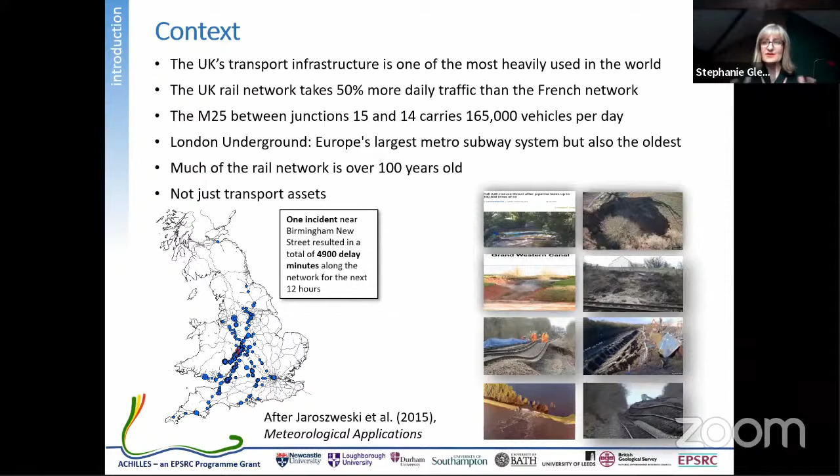So the illustration there is a failure near Birmingham that has cascaded to Scotland, across to London and down to the tip of Cornwall and into Wales. So failure is a big deal. In terms of its relationship to weather, we've all probably experienced almost anecdotal information that when it's wet, we get failures, particularly on the railway.

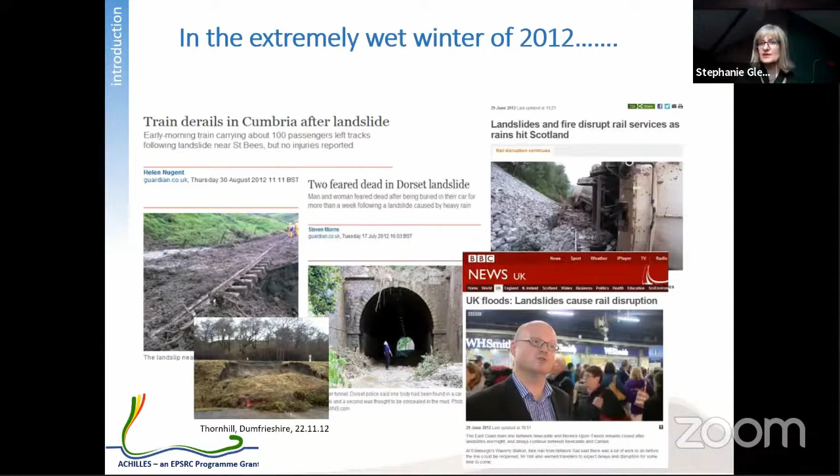So this was 2012. It was characterised by a wet summer, which is actually important, because part of what we found holds up our clay, particularly our embankments, but also to an extent cuttings, are the suctions that build up in those materials. They build up in the summer, usually because of dry weather. And when it's wet in the summer, those suctions don't last as long, and sometimes that loss of suction causes the triggering of failure. And this is showing the summer of 2012, but last summer in a wet period we also had the unfortunately fatal crash at Carmont in Scotland.

And looking at some data related to the effect of rainfall on failures across the network. This is a plot of soil moisture deficit, which is basically the amount of extra capacity that you've got in the soil to take on more water. So when the soil moisture deficit is 0, there's more or less no capacity to take on more water. And this is a plot with time across the x-axis.

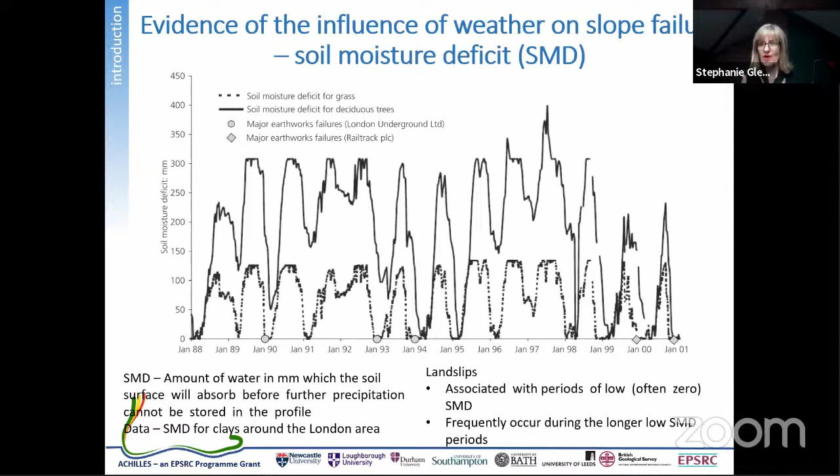You've got greater deficit or greater suction that's brought about with large trees, which is the hard line, and the dotted line, which is grass. And then the failures that occur around the network on the earthworks in London Underground and what was then Railtrack are when the soil moisture deficit is 0. So that's when it's wet. So we've got evidence to say that wet weather causes or is a trigger to failure.

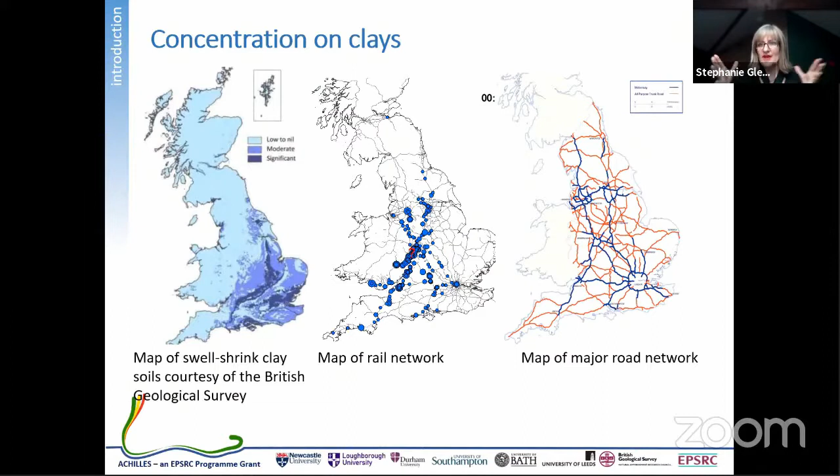The work that I'm going to describe, we have concentrated on clay materials. They aren't the only materials, they're not the whole picture, but it's just where we've started. And just to illustrate, it's a minority amount of material, but it's still significant because it occurs over quite a wide part of the network, and the parts of the network that are most densely used. So that's the scope of what we've done.

And what happens to those materials then, it's not just about wet, but it's also about the cycles of wetting and drying from summer to winter. One of the effects of those cycles is to cause shrinking and swelling of those clay materials. This is an embankment, and that then causes the differential movement of the track, which causes serviceability state failure. You can see that illustrated very well in that photograph. You can also see the out of true signals.

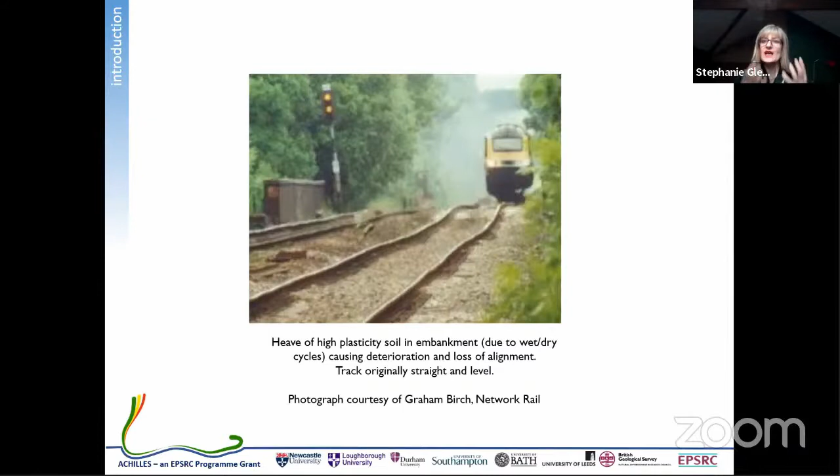And we also believe that this shrinking and swelling action, and I'll come to talk about this in a bit, has the potential to go on to lead to ultimate limit state failure. And this is an example, obviously it's a cutting, but this material here has deteriorated and then caused a failure, which is obviously causing great disruption. This is the London to Bristol line, which I'll use as a case study a bit later in the talk.

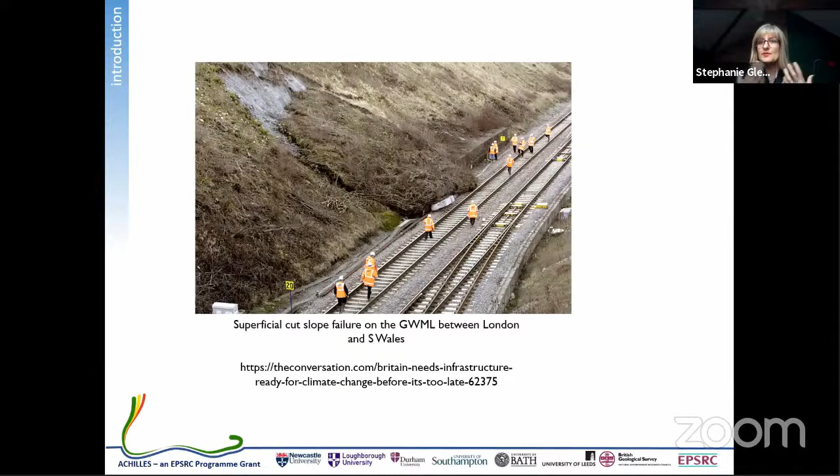So weather has the effect of wetting and drying that causes potential long-term deterioration. It also has the effect of potentially triggering failure. And what we wanted to do was understand these processes and these triggering events so that we could be more informed about how to manage this across the network.

So the ACHILLES programme, as I said, is concentrated on clay materials, but our aim is to add to the knowledge base that can deliver more consistent, affordable and safe services, and to add to the data about intelligent design, management and maintenance. Today I'm going to concentrate on railways, because railways are older. There are quite a lot of failures on the rail network, and the failures are far more costly and disruptive than predictive maintenance, and we could save a lot if we could more intelligently go in and put preventative measures in.

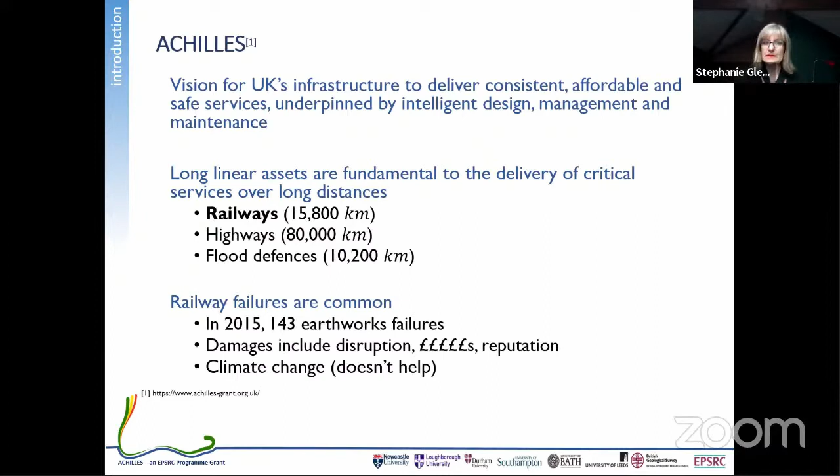So the work, again, is not starting afresh. We've got a long history of working, and this is a collaboration across a number of different universities. We're working with Loughborough, Durham, Southampton, Bath, Leeds and the British Geological Survey. And we're working together with our industry partners: Network Rail, Highways England, London Underground, and a range of their consultants. And also the Environment Agency on flood embankments, but that's another story.

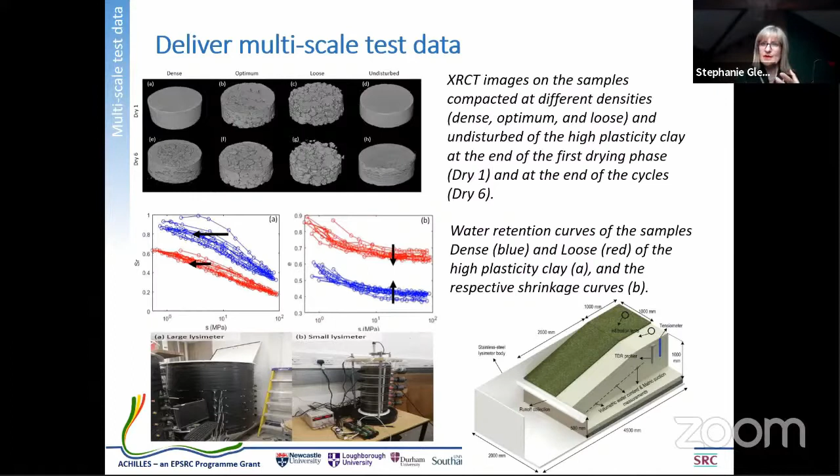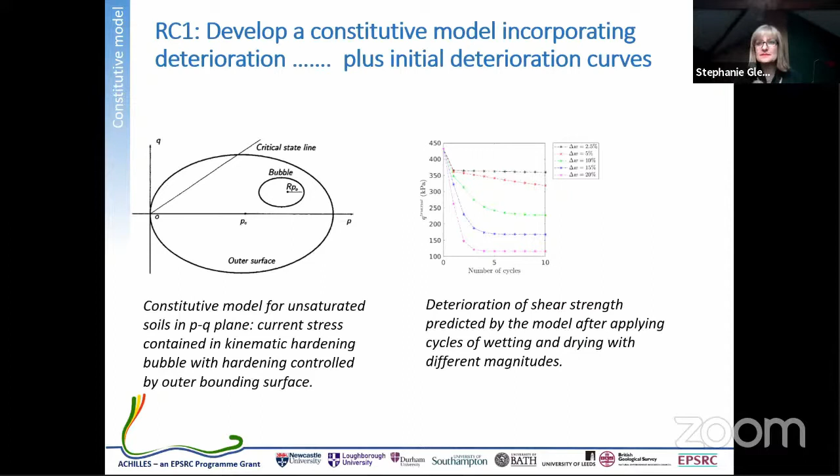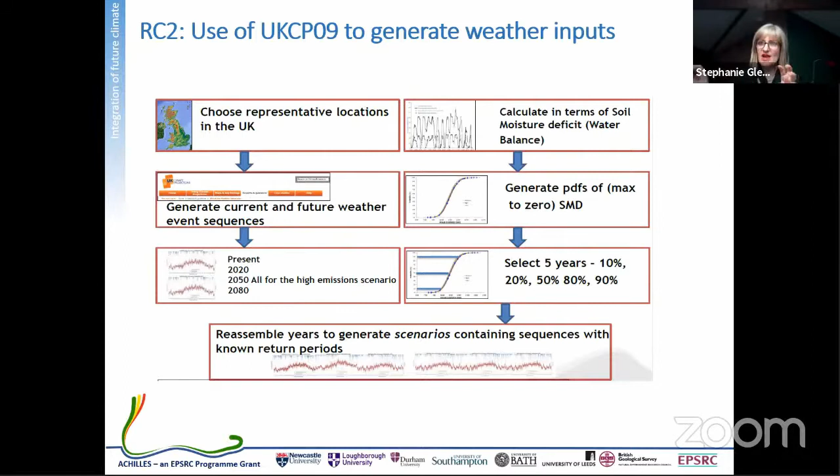We've not been able to use them directly because they give you lots of random weathers, which have extreme events at random points, which causes our models to then fail at random times. So we couldn't do designed numerical experiments. And basically what this slide is saying is that we had to construct our own weather event series in order to drive deterioration rather than to trigger failure.

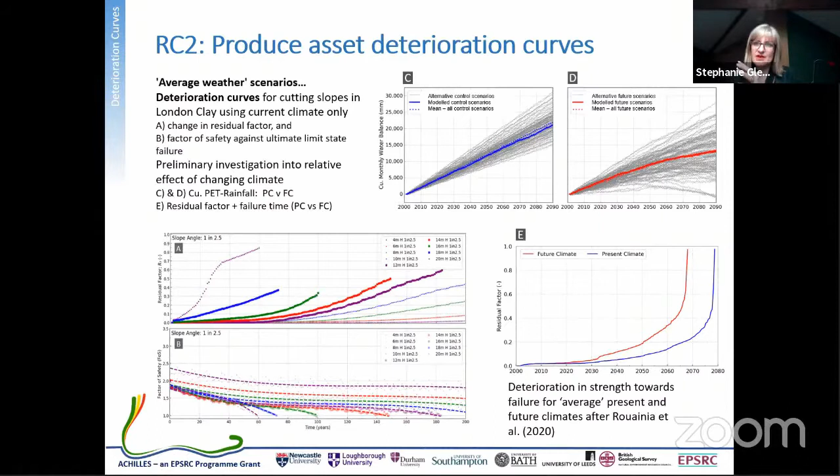And this slide then is to start to look at the implication using our numerical model with our designed future weathers. We've started to produce these deterioration curves. These are factor of safety, but the critical one on this slide is bottom right, that's saying that you can see with the future climate, which is the red line, that actually we've driven the material closer to residual strength quicker with a future climate than we have with the current climate. So this is starting to give us insight into the fact that climate change could accelerate deterioration in our clay slopes.

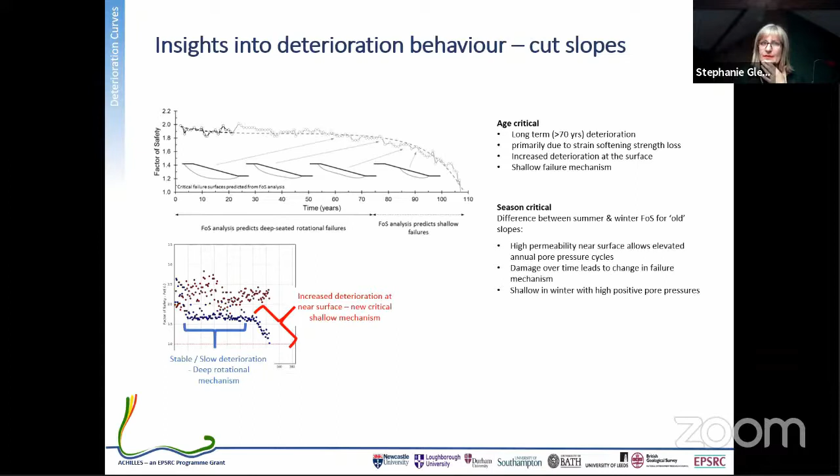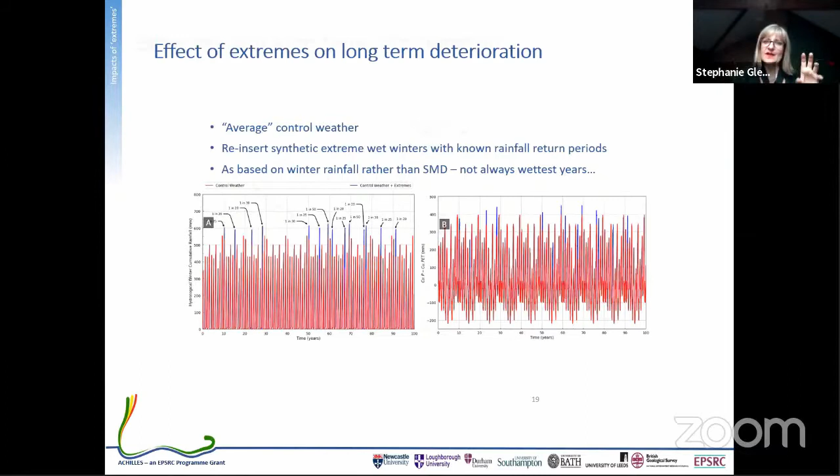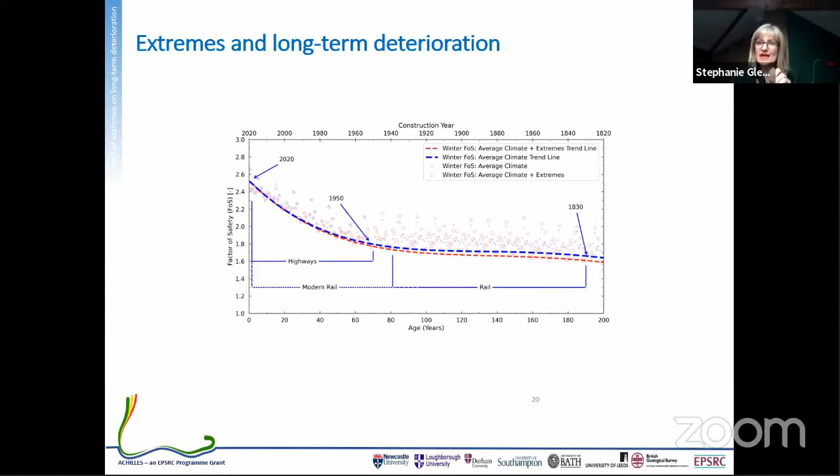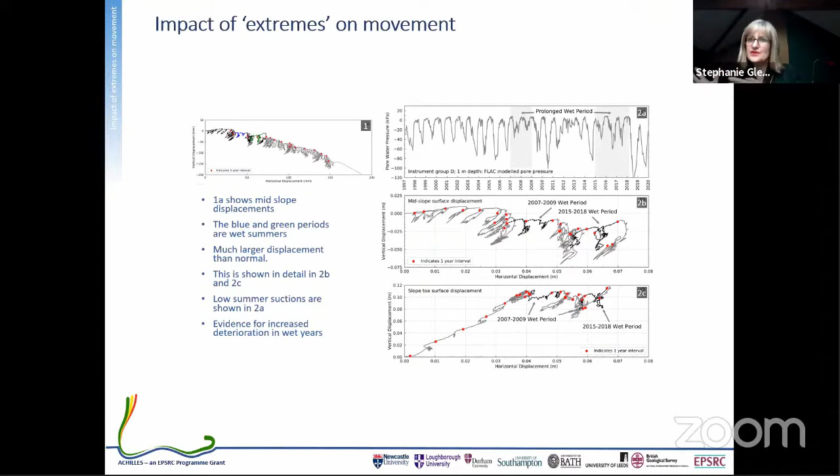We have also put designed triggering events back in. So we've looked at long-term deterioration, but we've overlain that with some designed extreme events. And again, the effect of that is to both accelerate deterioration, but also then potentially to trigger failure because your factor of safety is lower. And to observe how it does that is in this slide, where the wet period there is causing an increased movement downslope. And it's that acceleration of the ratcheting by the wet event that is accelerating that movement and that reduced factor of safety.

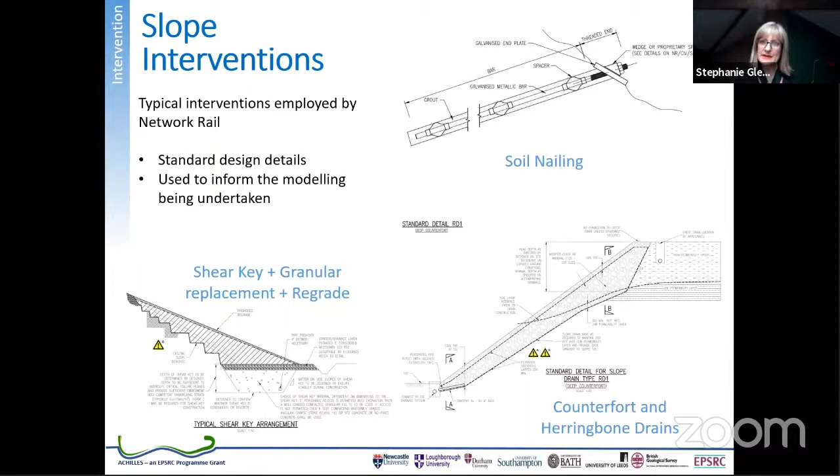Whereas actually, if we wait until it's seriously deteriorated or failed, you get much less of an increase in serviceable life. So it's starting to give us that kind of pointing towards the financial benefit, if you like, from doing preemptive interventions or maintenance rather than leaving the slope to fail, because actually you get better extension to life from doing that.

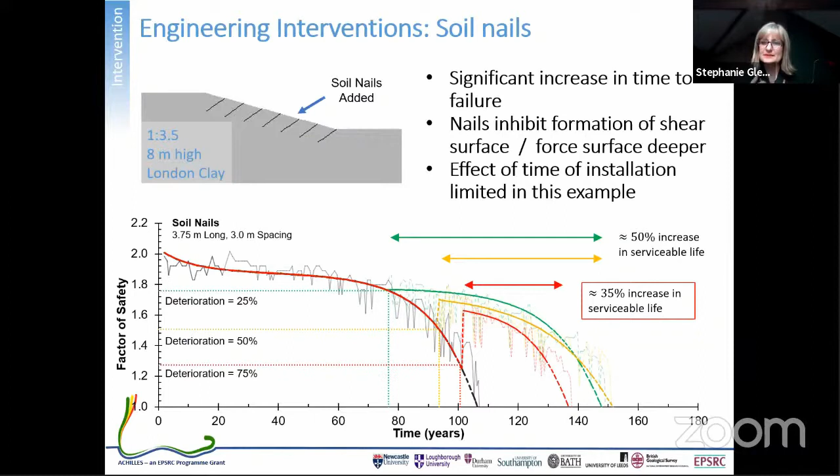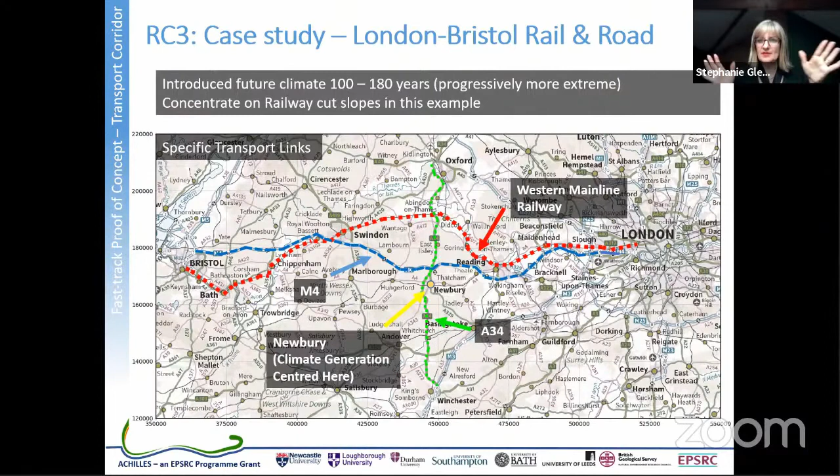The other thing we've done with the models is started to scale up. So instead of just looking at single slopes, we've started to look at the effect over a whole line. And this is where that London to Bristol line has come in. We've used this as a case study. We've also looked at the road at the M4, and we've taken some of our information from one of our field sites that's on the A34, but that's a by the way for the purposes of this presentation. Really, we've looked at that red line, the main line between London and Bristol.

And what we've done to narrow down the number of numerical models we've needed to run, because they're quite expensive in terms of time and effort, is to take the LiDAR data from the London to Bristol line and to look at a range of slope angles and heights that are most representative of what occurs across that corridor.

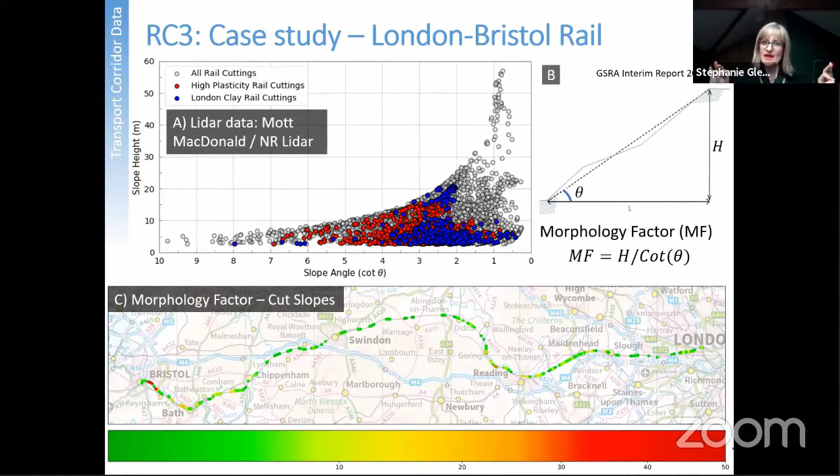And we've also used basically one set of material properties, and we've found this to be reasonable. We've taken London clay soil parameters to use in the model, because actually if you look, almost all the materials along that line classify as the same sorts of geological materials. It's not perfect, but it was a reasonable thing to do to try and look at the whole line.

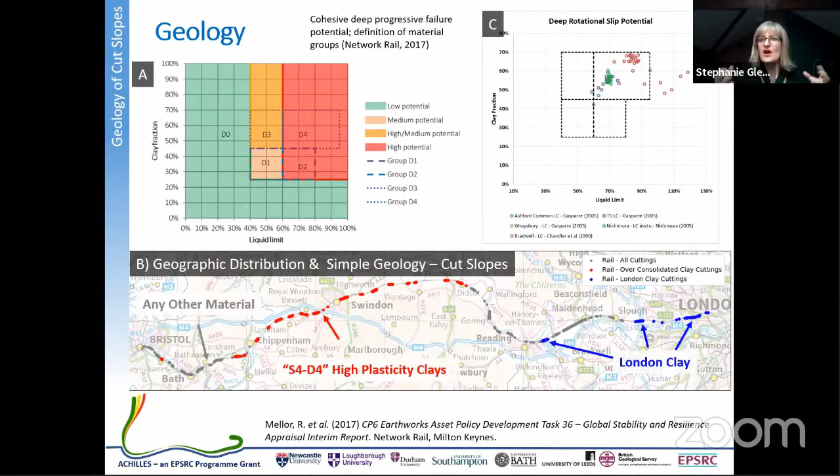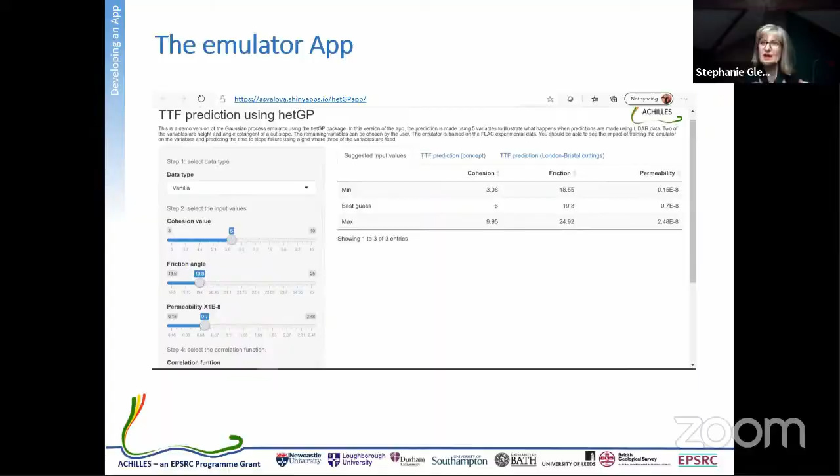And we've used this to create an app that allows you with a slider to change the soil properties and will instantaneously produce you a deterioration curve. So on this side you can change the cohesion, friction angle, permeability. You can do that with a slider. I think if we do the London to Bristol prediction, I hope this works.

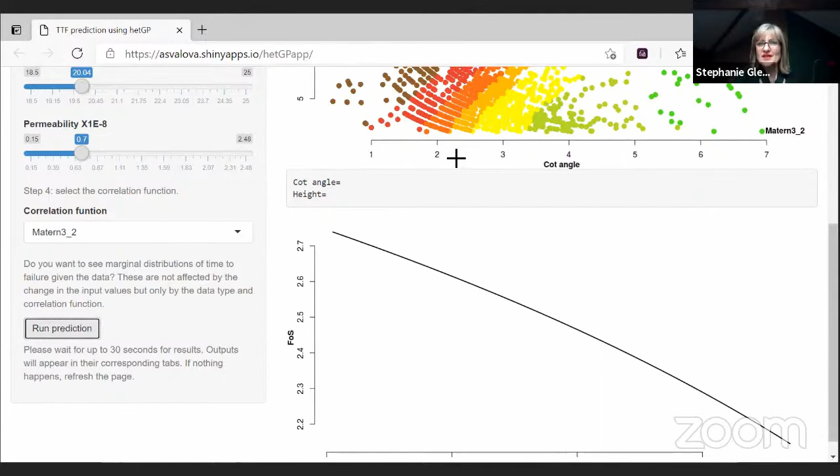If I run the prediction, yeah, so instantaneously you get a similar sort of plot that gives you at the top, for the different geometries, these times to failure. And it also produces a deterioration curve for factor of safety with time. So you can see the power of being able to do that instantly.

I'll stop the share and go back to my other screen. I think, hopefully, and if I move, is that working? Yeah. Yes. So, and it looks like magic. It looks like magic to me anyway.

But the results of that emulator still sit very well when compared to the real data, the real data that's actually been recorded from the actual failures around the network. So the power of this tool is to be able to look at existing lines and to do quite a quick look at the different geometries and materials, or it could be used in design to look at your different soil properties and different geometries and look at those deterioration curves with time. And we're working with Network Rail on the one hand and HS2 on the other to look at using this tool in practice.

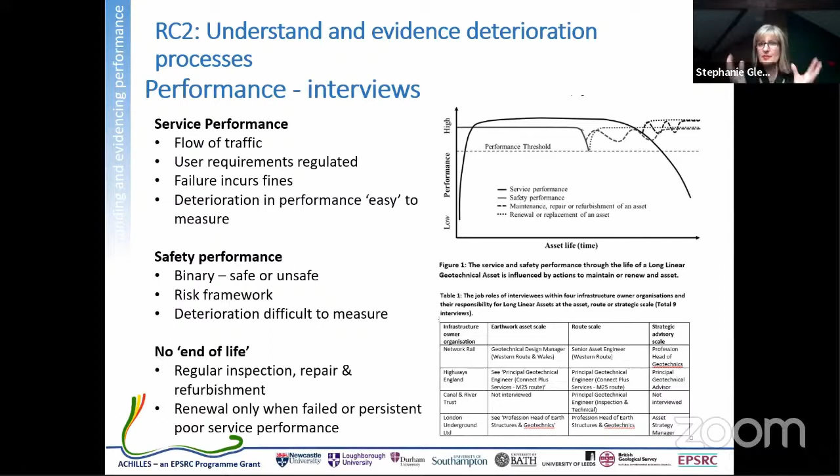Just a few things before I try and bring all of this together in one place: we've been wanting to understand this concept of deterioration and asset life and performance more fully, with what it actually means in real life to the different asset owners, and how we might use that to understand what performance thresholds are in order to start working on interventions, when to do those, how to cost them, and to look at the economics. And this is a piece of work that's in progress.

We're developing tools to go out and measure and rapidly assess the current condition of an asset with our colleagues from British Geological Survey. And we're enabled to do that because we have a number of different assets that we're monitoring ourselves and have done over a long period of time.

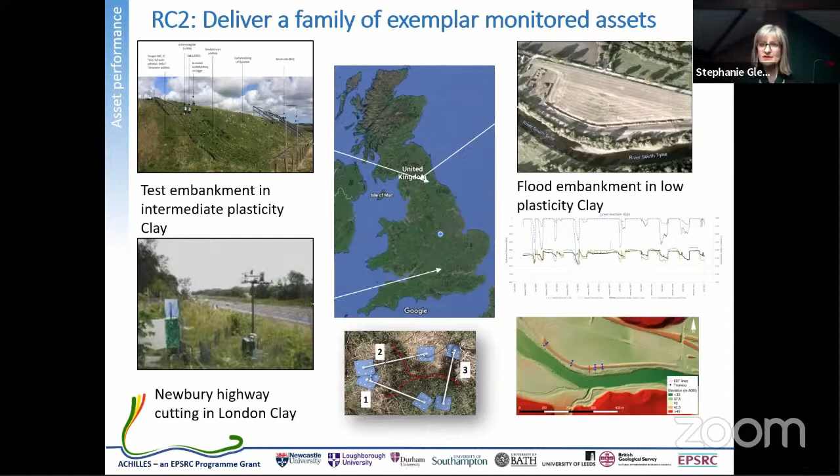And then finally, to bring all of these bits together, one of the outputs we're trying to look at is this concept of a condition assessment strategy. So you can look at a route, you can use the emulator to take a very quick look at that route and to look at the materials and the range of geometries to give you a sense of where your vulnerabilities are across that route.

And then having got those vulnerabilities, we can then use our more sophisticated numerical tools to take a look at those vulnerable parts more carefully, to look at what failure modes might actually look like and where that asset might sit along the deterioration curve based on its history, etc.

We can then look at going in and appraising that asset with some monitoring techniques, and then start looking with the asset owner at what the performance thresholds are for this particular asset based on its utilisation and its condition. Then we can start looking at what interventions we might be able to put in preemptively to extend the asset life, and then look at how much that costs.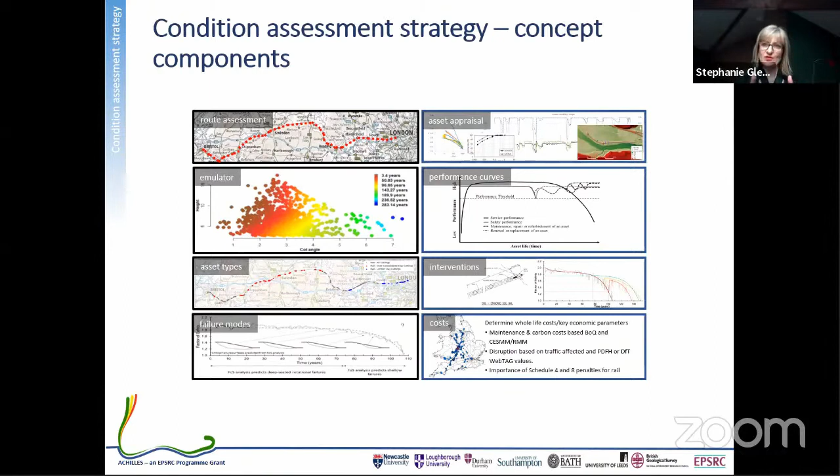So how much does it cost to put the monitoring in? How much does it cost to intervene? Versus how much would it actually cost if you got a failure on this line in terms of disruption, fines, and the social and economic cost of all that disruption to the users of the network. And that ultimately, in the next part of the research, is where we want to go, and where all these various pieces come together in decision support.

And so in the next phase we're looking at more monitoring, condition assessment, as I said, performance. We're trying to emulate the climate scenarios and the remediation options. We're working on design guidance with HS2 and looking at those commercial and societal impacts. And instead of having our 3 research challenges, we're now looking at monitoring, performance, simulation and design, essentially, and pulling all of those things together, working more and more closely with the asset owners.